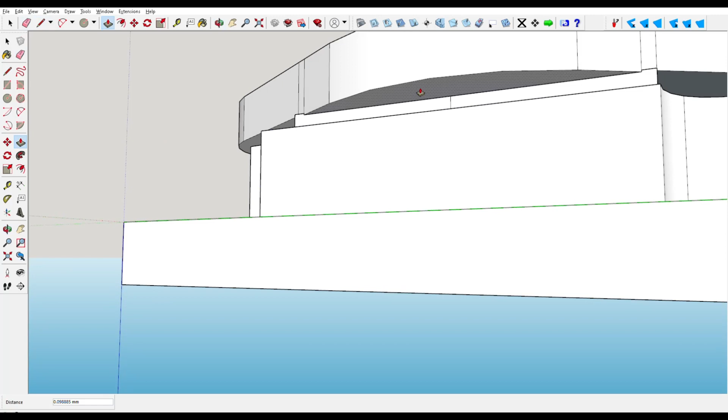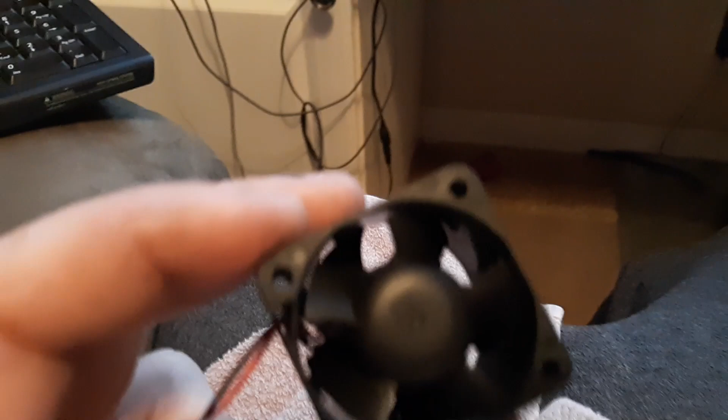Alright guys, so we are getting closer here. So we're going to use this as a supercharging fan on the 4-stroke. I know this sounds hilarious, and this is a server fan that goes in that case there. So this is an extra one I had. And let's see if we can do this without losing a finger. Oh yeah.

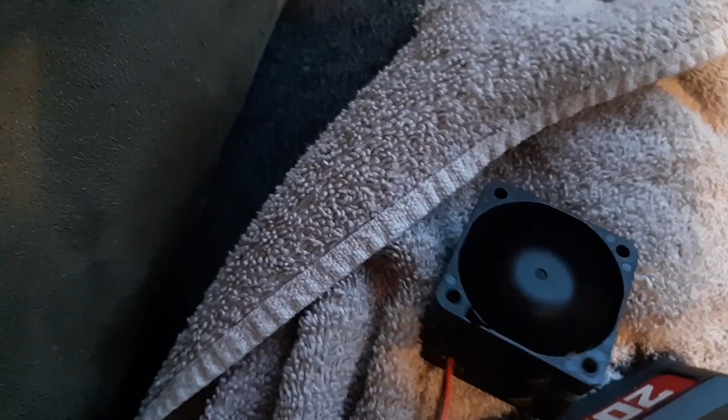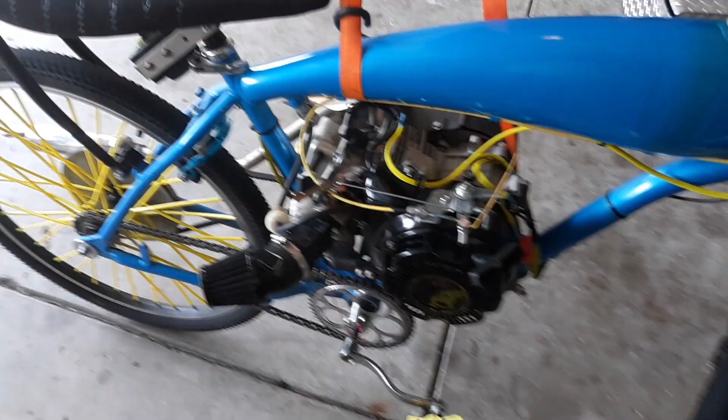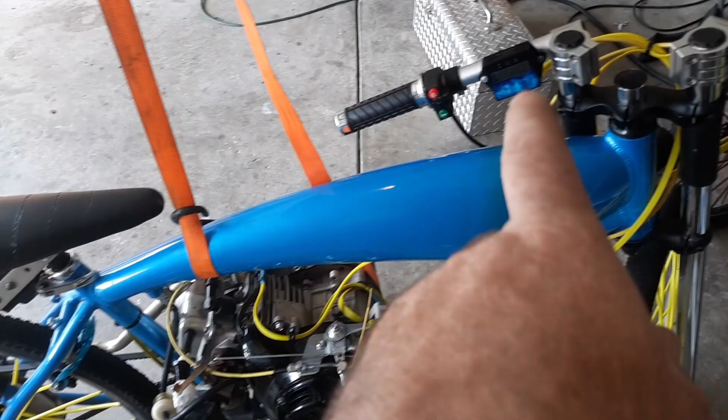Yeah, so there's like this huge debate over turbochargers and superchargers and blah blah blah on a 4-stroke, and honestly I don't think either are gonna work, so we're gonna try this just to see. I got the tach up there. We're gonna see if this does anything.

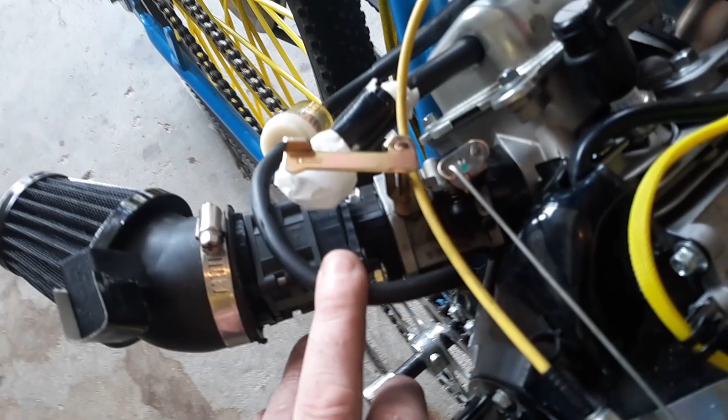This is a server fan and it's literally like a leaf blower. It shoots air out at like 120 miles an hour. But I took it out of a server, put it in, printed some brackets all up so y'all can see. Got my filter mounted. I can't put the thing, so I just put a coffee filter over this. No need for crap getting in the valves.

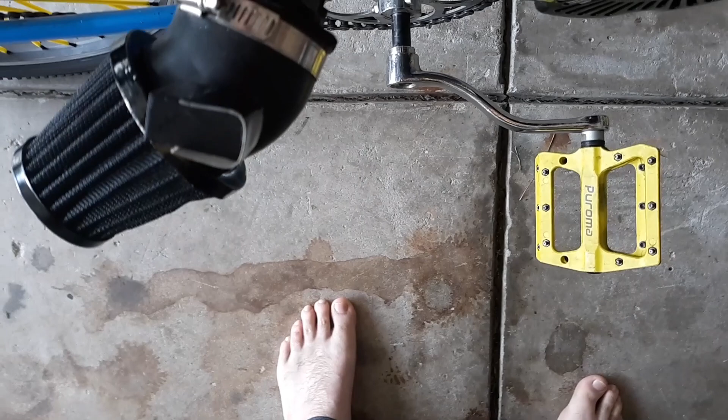So I'll give you guys a little test. Let's see if we could do this. I'll probably use one of the RC lipos since it's easier. But you can hear it. Not a big draw.

Alright. So, here is a little rundown of why you can't use a turbo. Well, number one, the valve structure of these small motors. You gotta really get up to like 300 and 340 cc's to really be able to use a turbocharger, because you have to change the valve sizing and stuff, and there's a lot of math involved, and you need fuel injection to be able to change the fuel ratios going in and out.

I mean, in theory, olden days, you could use 2 carburetors. Oh yeah. Then you're really getting into some crazy shit. So you could stack 2 carbs, I guess, in theory. But, I don't know. For the amount of money that it would cost to put in this turbocharging, a 79 110cc motor, you could buy a 300cc motor that has 10 times the power.

So it's not practical. You could spend $600 on a fuel injection system alone. Why do that when you could buy a larger motor and it's 6 times the horsepower? It's funny when you hear people talking about all this stuff. So anyways, we're going to supercharge one.

Now, I've got a lot of history with building motors, so I'm just going to say my theory right out. I don't even think this is going to run at an idle. I think it'll just die. I think it'll choke it right out. It's going to blow so much air in, it's not even going to pick up the fuel, and it's going to die.

High RPM, it's either going to do nothing, because the airflow is going to, I really don't know. You're going to hit a wall in the valves at higher RPM, because there's just not enough volume that can pass through the valves. So even if you're cramming this in, it can't expel it quick enough. So you can't put it in. I don't know.

At high RPM, it's either going to do zero or maybe a little bit. I doubt it, because even if you could achieve a boost for a couple seconds, there's not enough fuel flow. So in theory, you would need a second carb dumping about the same amount of fuel in to even create a boost.

So all these little turbo things and superchargers, it's kind of bullshit items, I think. But anyways, this is going to cram a massive amount of freaking air in. It's going to draw air in, blow it out. If that doesn't put this to rest, I don't know what else to tell everyone.

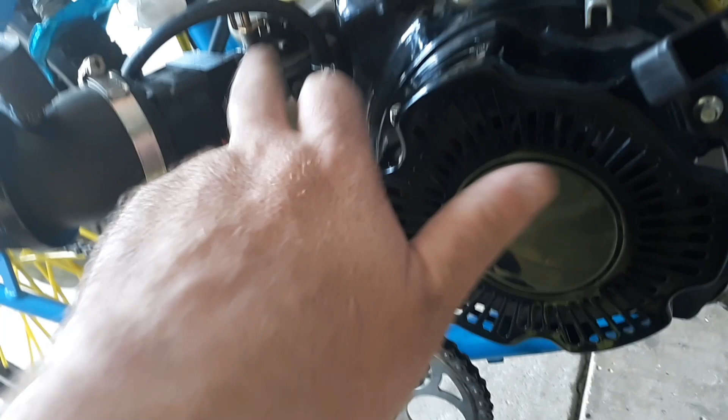I 3D printed some brackets. I put one of the fans in. It's like what you see on all the little eBay sites for turbocharging your car and blah blah blah, one of those kind of bullshit things. So anyways, we're gonna run this at an idle and try and rev it up and see if it even idles. I have no idea, I haven't tried yet.

And then we're gonna half throttle it, kick it in, and see if there's any change in RPM. If it's going to create any kind of boost, it's going to jump up the RPM. So we'll just see. I really don't have high hopes for this, but just for fun, let's do it. Right.

Okay, so when it was idle, I missed it the first time, but when the fan started going, it actually choked out the motor.

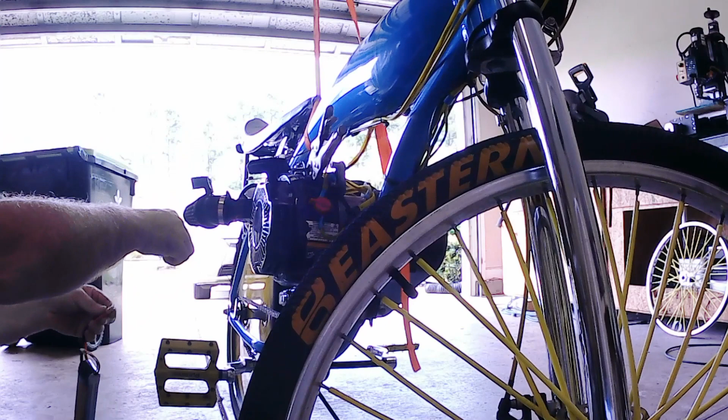So, this did absolutely zero. So, anyways.

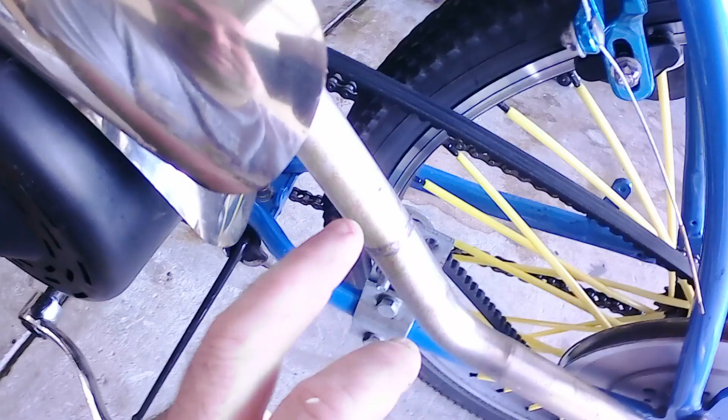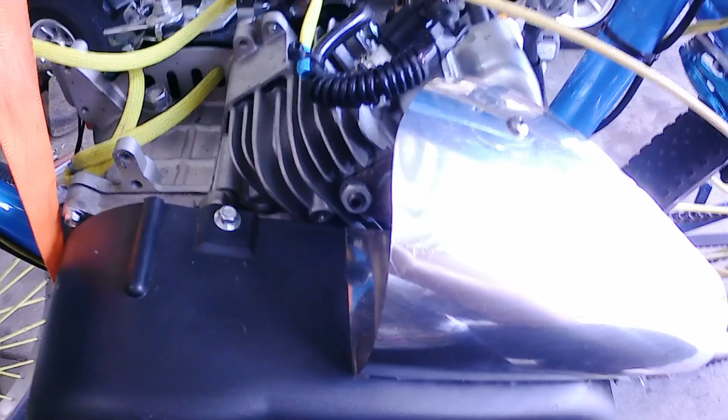The valves can only take in so much volume in these little motors and put out so much. So it wouldn't put out enough exhaust through the pipe to spool up a turbocharger. That's completely stupid for a little tiny motor. I think you have to get to about 340 cc's before it's even really worth it, and that's with fuel injection. So you're looking at some serious money.

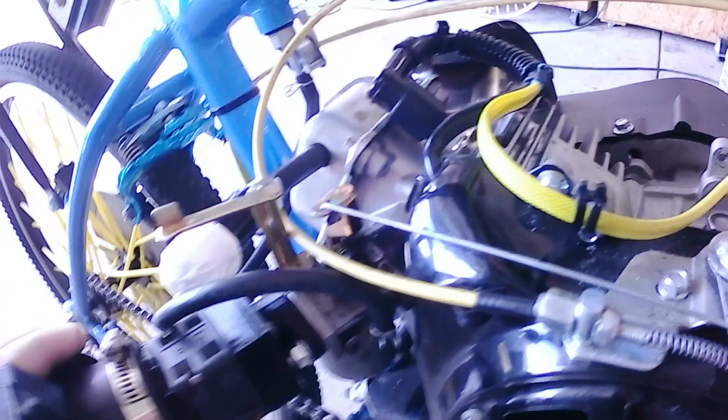Now, this is kind of holding true to what most say. You put too much air in when it's idling, it'll die right off the bat, which it does. Up at higher RPM, even though you're blowing more air in, it probably puts out a little more power to some extent. I doubt it very much, because you're limited by the valve structure of the small engine. And the carburetor would need to dump more fuel at the same time. So that could get pretty involved.

But anyways, as far as can you supercharge or turbocharge the little 70cc, 80cc, 110cc motors, I highly doubt it, unless somebody did some major reworking of the valve systems and cams, and you would probably have to have a secondary carb to dump more fuel in once it hit a certain RPM. I guess you could, but I definitely won't be going that far. I did this just for fun, just to see.